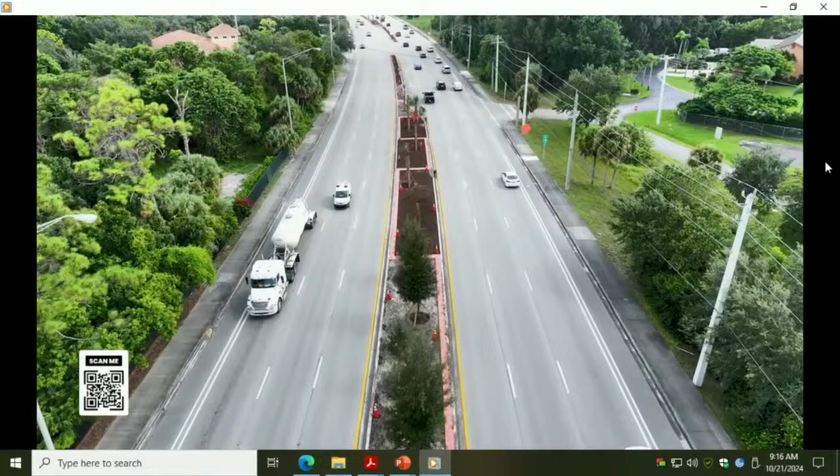Our 2050 LRTP is our 25-year planning horizon document that'll be our guidebook for the transportation projects in Martin County, and we're very excited about that. With innovative solutions, and most importantly, community input, we're shaping a future where transportation enhances the quality of life.

Transportation is extremely important. There's individuals who solely rely on that transportation service, and it's imperative for them, knowing that there's a bus system that will be there every morning. The LRTP is a commitment to sustainability, safety, and resilience.

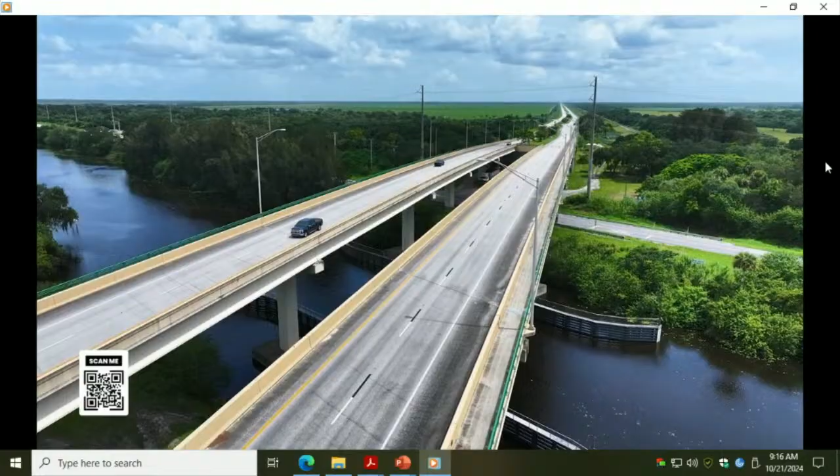From roads, bicycle lanes, sidewalks, freight, and waterways, the MPO's LRTP looks to enhance all aspects of the transportation network. The infrastructure has not caught up with the demand of supply, and we don't have the roads to carry all these trucks. Through planning and collaboration, we're ensuring that Martin County moves towards a better future.

The Long-Range Transportation Plan is paving the way for a smarter, greener, and more inclusive tomorrow. Join us on this journey towards a better future. Participate in our survey, attend our workshops and meetings, and share your vision. For more information on how you can get involved, visit our website at martinmpo.com. Martin Moves 2050 - together, let's plan a better future for Martin County.

So that's the video. We'll be sharing that widely. We also have a project webpage that sits on the Martin MPO website. We made sure that the project webpage is ADA accessible, and there's a QR code so that folks can easily access it without having to remember the entire URL.

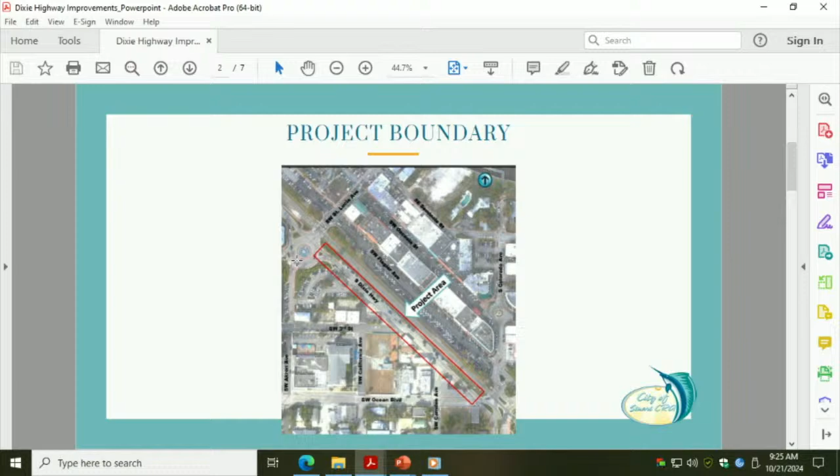Right, forward. Use the mouse wheel. There you go, sorry. So you've seen this multiple times. The scope of the work is improvements along Dixie Highway from Joan Jefferson to Ocean Boulevard and Colorado Avenue. Can I interrupt for 1 second? Can we make it full screen so it's a little bit bigger? Please. Thank you.

You'll note that 2 feet of our travel lane is actually in the FEC right-of-way. So if they don't want us to make any modification, what we want to do is just work within the city's right-of-way. Should they ask us to remove those on-street parking, we can easily do that and put that location back into the condition it was prior to installing the on-street parking.

After the meeting, we went back out to the community and presented different options, and the consensus was they do want to keep two-way traffic. So the proposal before you today is two-way traffic, and we also went to the CRA board and received approval on the conceptual you're going to see today. As far as the confusion corner, that's currently not in the scope, but we can discuss that after we discuss the scope of the project.

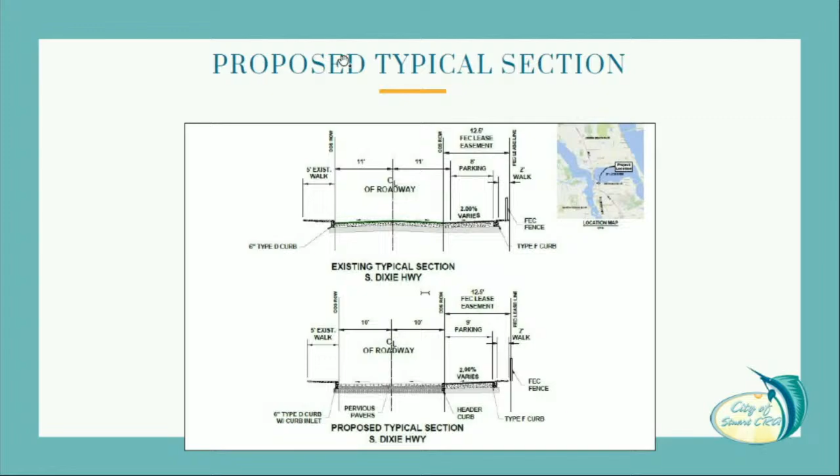This is really just to give you an idea of what the corridor could look like. At the bottom is the proposed improvements. What you see out there today, this is the old Creative Auto site.

The gentleman that purchased that has come up with a plan for an improvement to this building, some outdoor seating and so forth, and some landscaping. So we put that into a landscape rendering.

You can see the pavers proposed here. This area on the left side of pavers is actually southbound, and the area here is northbound. We will probably just leave the asphalt that's out there in the parking spaces that potentially could be removed, which is on the right side along the FEC Railroad.

You can see sidewalks, some trees being added, and the street lights. A major improvement - if you go out there today you'll see there's ponding of water. We plan on also providing underground storage or exfiltration pipe with inlets and so forth to provide drainage for this corridor, so there'll be some improvements on the drainage in here also.

Having said that, I would entertain any questions.

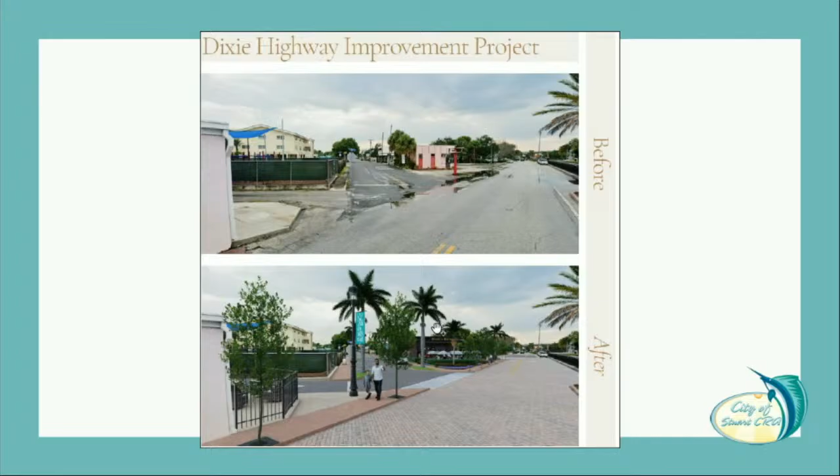So we think that we are a little bit far along with the Dixie Highway Improvements Project, that we could easily, if this were to move forward, just modify the perimeter of the Dixie Highway Improvements Project and still be able to achieve what we want to achieve with Dixie Highway, and then work on this as I get direction from my board.

Maybe Commissioner Smith might want to speak a little bit more on this design. Great, well thank you. Do you want to go first, or do you want me to go? That's just new to me, so I'd like to hear about that first. Maybe I could incorporate some of mine.

So last time we talked about this, there was a lot of conversation, certainly about Dixie Highway and what was being proposed as a one-way link. And I think putting it back to two-way was probably the right thing to do.

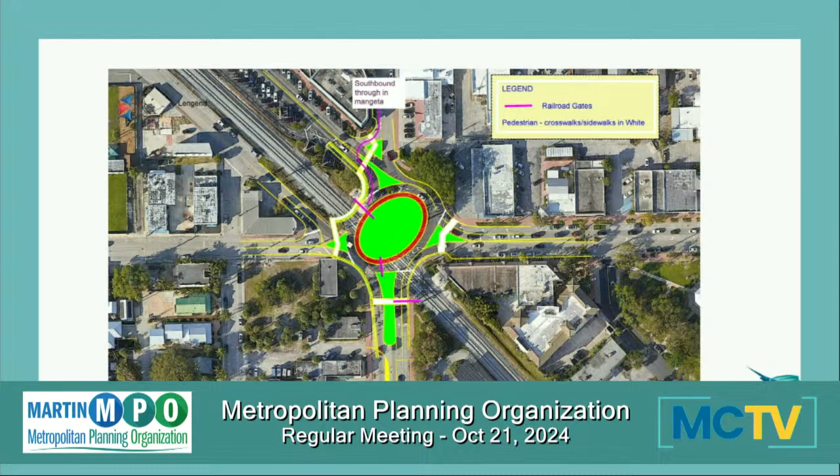But there's also, I personally think, because I'm in this intersection at least 5-6 times a day - my wife's office is 2 blocks from the roundabout here - I watch people do the craziest things known to mankind in the current configuration with all the little islands, the splitter islands.

If you come north on Colorado into the roundabout, the other day I watched a truck come into the through lane because the backup trying to go up Dixie Highway to the north was probably 12-15 cars long, and he decided he's not going to wait for that, so he flew into the middle lane, flew around the roundabout, because when you come out of the roundabout into Dixie you get the right-of-way going onto Dixie North, which caused all sorts of issues because people were watching what he was doing, and it just got everybody even that much angrier.

The 2 cars that can stack now in the little piece at the end of Southwest Ocean Boulevard as you come into the roundabout, that's a constant battle as to who actually is going to give and who has the right-of-way going into Dixie Highway North or coming out of the roundabout.

Likewise, coming south on Dixie, what we discovered when we were looking at this, and what I think Michael can still fix if there's interest to do this - today if you're coming south on Dixie into Confusion Corner, you cannot go to East Ocean Boulevard east. You have to go south on Colorado to do a U-turn or come on some other direction.

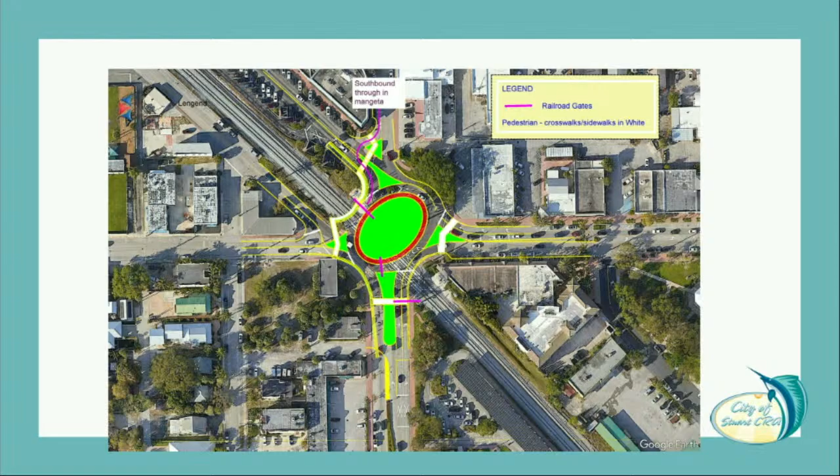There's a question whether we lose or don't lose the parking on the east side, which I think Pinal is 28 spaces, correct? On the east side? The church certainly has been under contract, at least that I know of, twice in the last couple of years. Chances are at some point in the future that property is going to redevelop. I think they've already acquired or are in the process of acquiring property out on Kanner. And so then you have the couple commercial buildings on Dixie Highway today that have communicated in the past that there's interest in selling at some point for the right amount of money, clearly. But that isn't going to happen yet.

And so my suggestion, at least for everybody to think about, is that the plan should be designed about what you want the final cut through or cut line to be actually going through Dixie Highway.

Southwest Ocean, you have all of the right-of-way, you have on-street parking on both sides, but it could certainly use a facelift, and it could use a treatment and an application of that treatment like is being proposed for Dixie, that could really make it a great-looking street and help it redevelop someday into a destination street, very much like what happened to Colorado 10 years ago when the city decided to completely redevelop the cross-section of all of Colorado going out to US 1.

I can share with you that having my wife's office on that section of Colorado, it's an entirely different street. It behaves differently. People come there. It's a very active place to go now, where it wasn't 15 years ago. There was a lot of criticism of the city back then when we took out two lanes of through-traffic off of Colorado, that it was going to shut it all down and make it difficult, and it did just the opposite. It's made it flourish and become a great little component of Stuart.

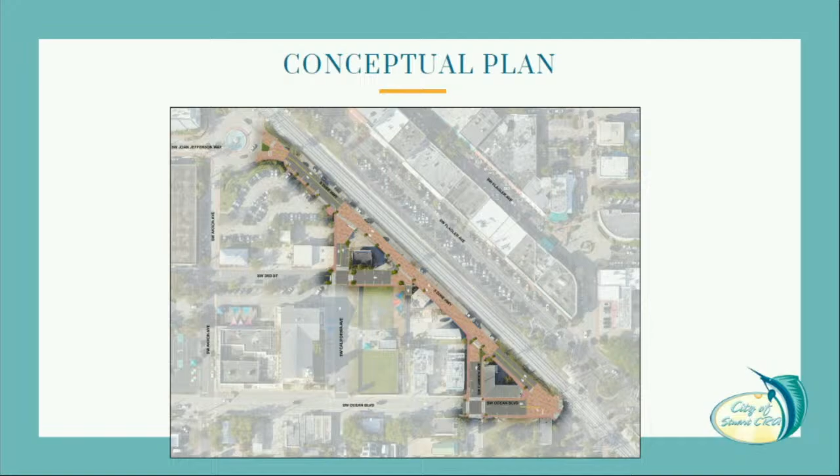I think that's it. Commissioner Hetherington? I think that, Chris, is that you? Oh yes, it was me again, George Zama.

I just wanted to reinforce that the agencies submit for these grants and are approved by the board ultimately for DOT to include in their work program. Once the scope is submitted, DOT, there is a little bit of flexibility, but once your project limits are established, it is greatly recommended to stick to the original scope.

I think going back and reanalyzing the traffic flow was a good process, and overall I think it's a great project. The other thing I wanted to mention is the approach moving forward. It would be good to know, for all the agencies, the MPO board's expectations for these types of projects.

As Commissioner Hetherington mentioned, we only get about $450,000 of allocation. The county's approach for these types of projects has always been that the greatest cost benefit comes from adding pedestrian or bicycle facilities, like sidewalk projects.

That doesn't mean this project doesn't qualify by any means for all the scope that's been added, because from what I understand, historical, cultural, environmental, which includes vegetative management for projects, do qualify. So moving forward, the county can scope out certain projects for TA grants.

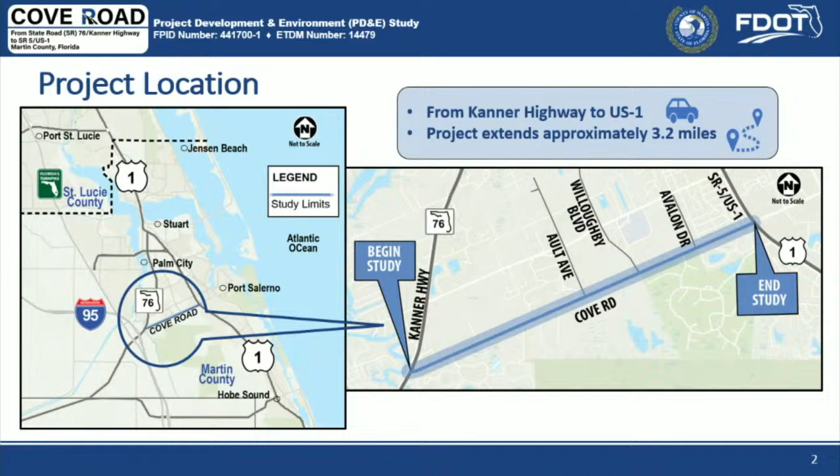The existing road from Kanner over to Avalon, about 3/4 of the project, is a 2-lane rural road. It widens out for left turn lanes in some areas. It has swale drainage and sidewalks along both sides of the road, and we've got plenty of right-of-way. It was really intended to be widened to 4 lanes through this section.

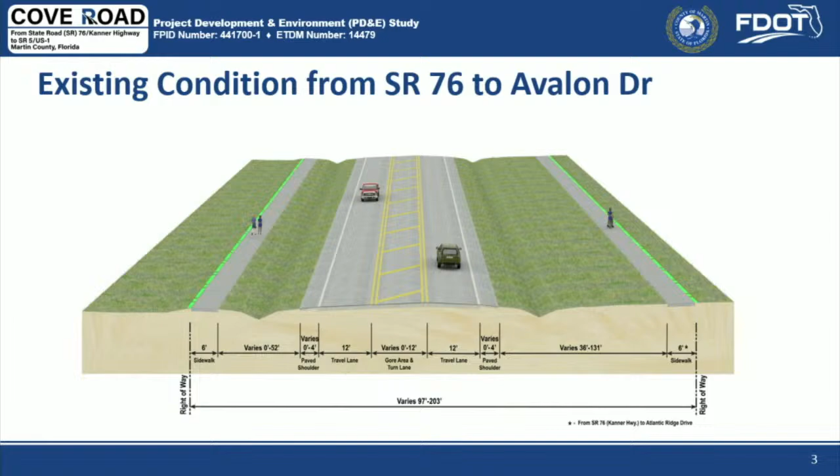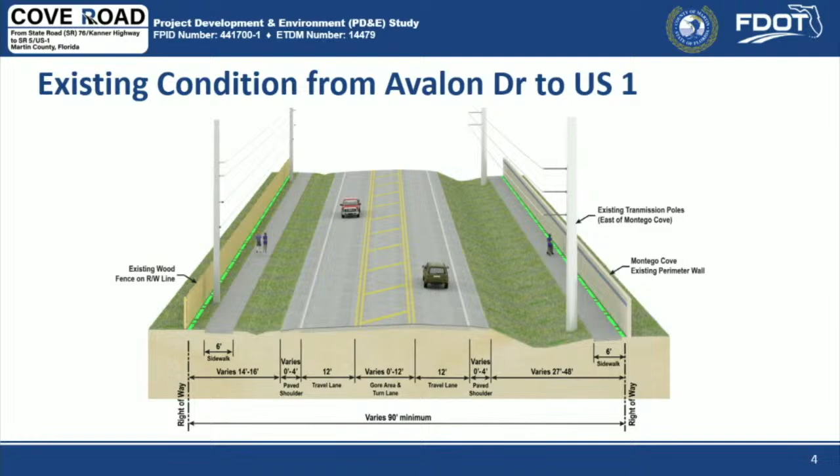The last quarter of the project, from Avalon over to US 1, is really where we have our constrained right-of-way. We're down to about 90 feet of right-of-way, so getting a 4-lane road in here has been quite a challenge. On the left side is the north side of the road, that's the Hibiscus Park neighborhood, and they back up to Cove Road. On the south side we've got the Montego Cove condominiums, a 55 and older development, and we've also got some large transmission poles that come into the right-of-way in that area as well.

As far as public involvement goes, we had a kickoff public meeting in March of 2023. We held our alternatives public workshop in May of this year. We presented to you all prior to that meeting and told you we would come back and give you an update of what happened. We've had a lot of things go on since then, so that's why it's taken us a little longer to get back to you. We've had small group meetings with some of the neighborhoods, the South Fork HOA, and the other developments at the west end of the project. We met with the Montego Cove board as well. As Vanita said, we've got the public hearing tentatively scheduled for early 2025, and this is the project website, which we update with information as it becomes available.

So this is what we presented at the public meeting. Essentially, we had 2 options in the first segment. The first one, 1A, had on-road bicycle lanes and a shared use path on the south side and a sidewalk on the north side of the road, a 4-lane divided roadway. Alternative 1B is the same essential 4-lane divided roadway, however we removed the on-road bicycle lanes and have shared use paths on both sides of the road. That seemed to have a lot of support from the board previously.

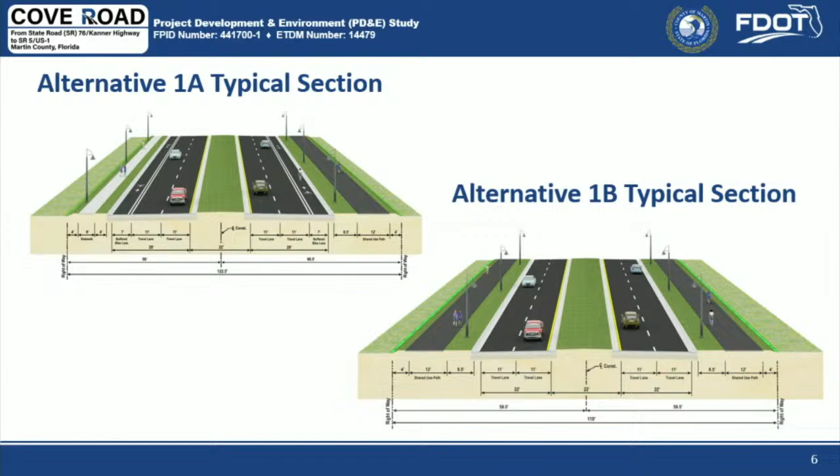In the second segment, we looked at a couple different options that included various combinations of on-road bike lanes, sidewalks, and shared use paths. 2C is the one that kind of mimics 1B with shared use paths on both sides. It did require a little bit more right-of-way than alternative 2D, which we really looked at to see how much we could reduce the right-of-way footprint, pulling the sidewalk up to the back of curb on the north side of the road and some other things. So that's what we presented to the public to get their input.

Can you go back just for that? How do I go back, Ricardo? Mouse wheel?

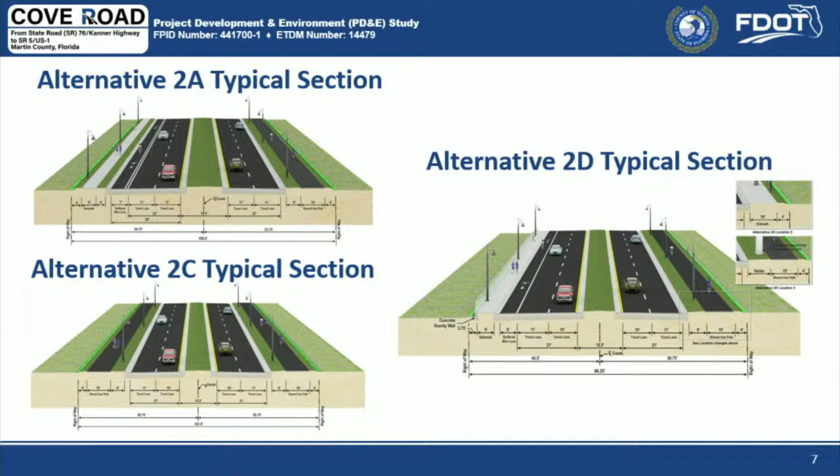So the difference between 2D and 2C is that little pull-out flyout, sidewalks next to the curb. 2C does not have any on-road bike lanes, while 2D has a bike lane and it's got the sidewalk on the north side. Essentially, we can't use a sidewalk to provide both bicycle and pedestrian function. So if we have a sidewalk, then we have to have a separate bicycle lane, whereas a shared use path is wider and accommodates both. Thank you, I didn't see the nuance.

That's all, thank you. So we did receive a lot of different comments related to noise, people asking for traffic signals at their neighborhood entrances, some different specific things about U-turns. We did get support for the roundabout that we had shown at the Ault Avenue intersection, people asking for trees and street lighting. But we did get support from the public for the 2 options that had the shared use paths as opposed to the bike lane options. So that's 1B and 2C.

Some of the concerns raised were typical for where we're going from a 2-lane road to a 4-lane divided road, where people currently can go out and go left from their sidewalk or their driveway, and now they've got a median in front, so they're going to have to go right and do a U-turn to come back. That was not unexpected.

We did have a few comments related to flooding, noise, and some other pedestrian-related comments. There were really two areas that we focused on after the alternatives meeting based on the input we received from the public. The first is the area at Gaines Avenue, where we had a lot of input from residents related to vehicles towing boats and horse trailers and how they access this area. The other area was down at Montego Cove, with some concerns about access to and from their development.

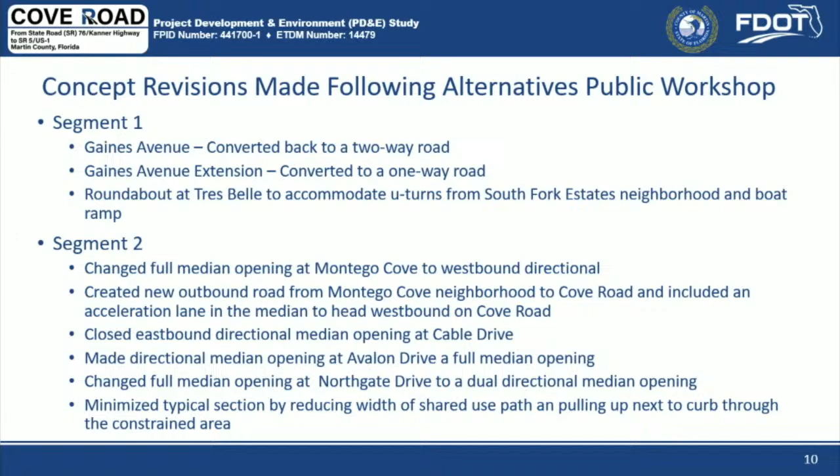As we were completing these revisions that we were going to go back to these neighborhoods and talk about, DOT conducted a value engineering study—a week-long study where they look at our preferred alternative to see if they can come up with cost savings ideas or value-added ideas to improve the concept. During that study, the midweek meeting on a Wednesday, we knew what they were going to propose, and that Wednesday night was when we had scheduled our first meeting with the South Fork residents. So we were able to say, this is what was proposed to them. The value engineering came up with another option, so we were able to get input on both options at that meeting. Then the next night, we met with the Montego Cove folks.

There were some minor things that came out of the value engineering related to bulb outs for U-turns, extending some turn lanes, the revisions at Gaines and Montego Cove that I just mentioned, and also a new pond site that they recommended we look at.

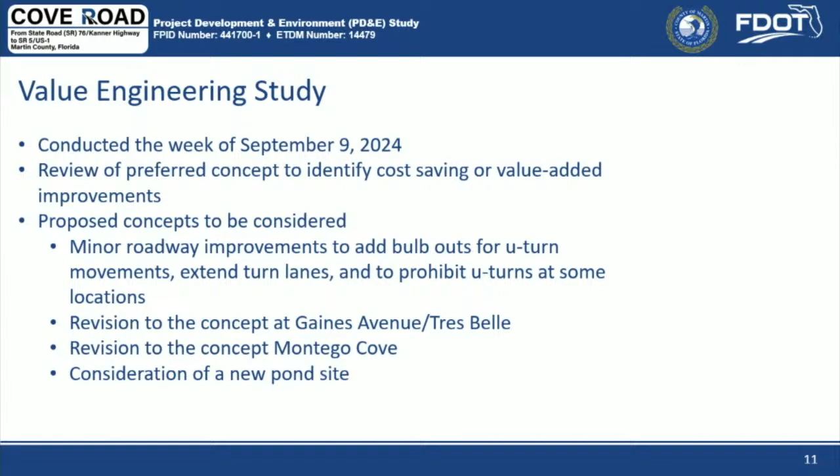After all of that, we do have what we are saying is our preferred option—alternative 1B with the shared use paths on both sides of the road. We can generally fit within the existing right-of-way through this segment. We do have the roundabout proposed at Tres Belle, closer to the west end of the project, and then the Alt Avenue intersection. There are other signalized intersections that are existing that we would maintain.

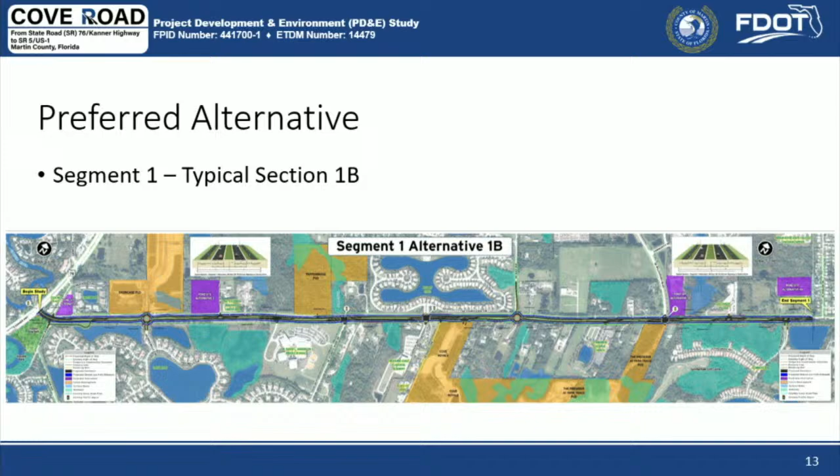This is the existing condition at Gaines Avenue. Right now, when you come off of Kanner, you can only turn right and go south on Gaines Avenue. It's a one-way connection at Cove. This Gaines Avenue extension was constructed by the county because they wanted to move this full access away from Kanner Highway, so this is a two-way road. We got a lot of input from the public about concern for trucks with trailers making this sharp curve and conflicting with other cars that are sitting there waiting to leave.

This is really the one area that I mentioned. The value engineering concept proposed to close this connection of Gaines Avenue altogether and force everybody down to this one location. Well, the residents didn't like that at all when we met with them. So this is the concept we're moving forward with, that we showed to the neighborhoods down here and they liked—converting Gaines Avenue back to a two-way connection at Cove Road, so they can go in and out of this location. And since we're proposing to close this full opening at the Gaines Avenue extension, it's providing a westbound directional—a one-way road that we'll make a little wider to accommodate. So they like this idea.

How do you go west out of Gaines onto Cove?

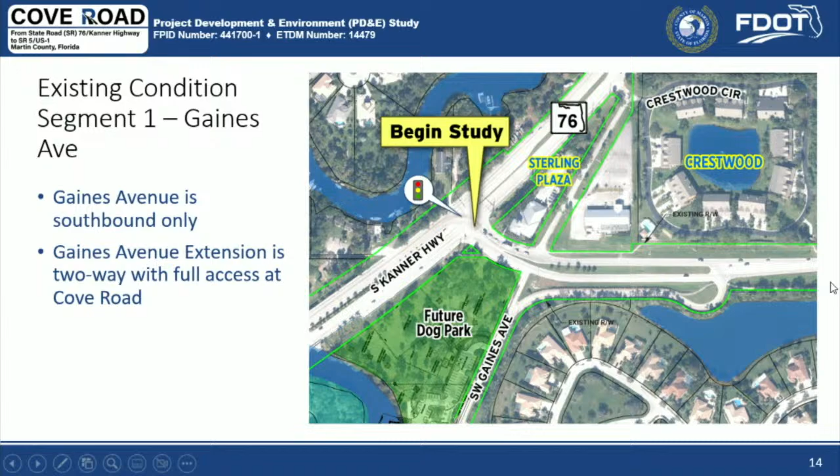It just seems so counterproductive to cut off Gaines from being able to go out to Kanner. Well, at this location, you're right, they'd have to go farther east to do the U-turn. The other benefit of the roundabout at Tres Belle is we got a lot of concern from people saying that people coming off Kanner are just flying. One reason is there's two lanes here and they're trying to get down to one lane, so they're trying to beat each other to the point, which we wouldn't have. But again, this is seen as kind of a traffic calming improvement as much as anything.

Mr. Hurd, any other questions on this area? Yeah, I'm confused. So we're talking about Gaines. Are the people on Gaines going to be prohibited from turning west? Yes, correct. So they're instead going to go on Cove Road east to the roundabout in order to go west? Right, okay.

That's okay, no, I think if I lived down on Gaines, I'd be pissed. I don't know, I'm a fan of roundabouts. We did get a lot of positive feedback. I think the boat trailers and horse trailers, people really like the idea of being able to do something like that. Yeah, I just would do it further west, that's all.

I think it's worth considering that if Gaines stayed two-way traffic down to where the bulb out is in front of Tres Belle, that you do the roundabout there. Just to look at it to see what it really does to hurt anything, versus it gives the Gaines people a couple hundred feet less, you got to go east to go west. Because right now you can go west on the current configuration where it is, but anyway.

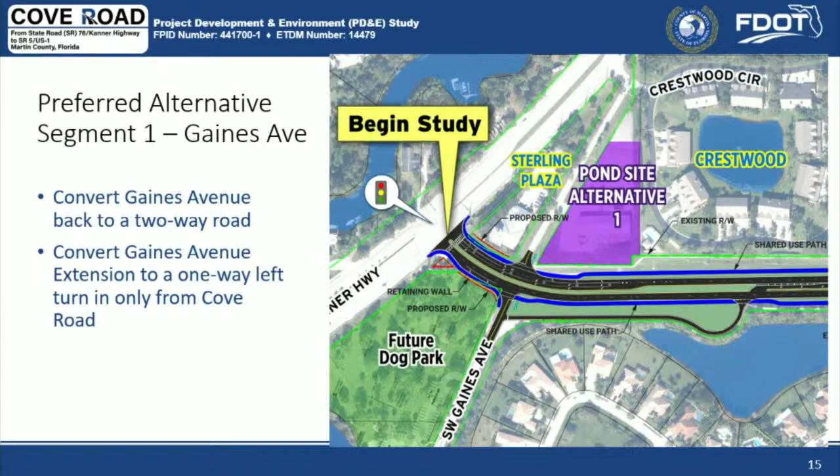Anything else on this? Not unless you all have any other questions. But any other segments you were gonna highlight? Yes, I was just going to quickly touch on Alt Avenue. We've got the roundabout proposed as well, that we got a lot of positive feedback on at the public meeting.

And then in segment 2, this is really the tight area. So what we essentially did was take the 2C option with the shared use paths and convert it to the 2C modified, which is minimized. We met, we've got some design variations that are going to be approved because this is a really short constrained section. We've got an 8-foot shared use path, the lowest you can go as far as width, pulled up to the back of curb.

We are currently working on the noise study, but we anticipate a noise wall will be warranted along the back of Hibiscus Park. So we're going to use that as a dual purpose retaining wall and noise wall to stay out of the right of way. We've got a minimized median down to 15.5 feet in this area. Again, there are areas we may pull this shared use path up to the back of curb, but we can essentially fit this between Montego Cove and Hibiscus Park with no right-of-way impacts for that segment.

So curious, you said the median, what's the width of the other cross-section median? 22.5 feet is a standard median width. So on the west section, on the 1B cross-section, you've got 4 foot on the south side between your shared path and the green dotted line, right? Mm-hmm, yes, you've got 4 feet there. You've got 6 feet where your light poles are, so you've got 10 feet.

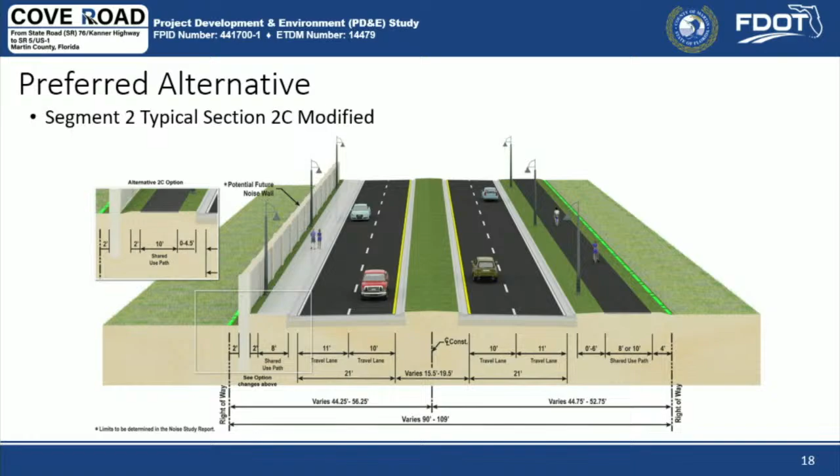Yeah. Chris? Thank you. Okay. Anything else? Oh, I'm sorry, Stacy. Commissioner Hetherington, this was for the end of the discussion.

You mentioned, and I've talked to some residents in the area that have flooding concerns and water, and I know this is in the PD&E, the environmental side - I would hope that we're considering a significant amount, much more drainage potential than our current Cove Road in this existing segment all the way down.

Yeah, there aren't really any ponds for the road right now. It's just roadside swales. This proposed improvement will include curb and gutter with piping to offsite ponds. So we've got several ponds identified. Thank you.

Again, you can see a little bit here - this first part is kind of where we're in that tight right-of-way. Once we get past the end of Montego Cove, they've got sidewalk access to this building that we need to get past. Then we are widening back out and having more of the offsets that we talked about through the last half of this. But again, I'll go back and look and work with our roadway designers and see what we can do there.

Hang on a second. Mr. Collins? To Commissioner Hetherington's point, with drainage, of what's getting built there in terms of sidewalks and concrete - is any of that permeable? Is there any look at, because to me, if you're going to build anything new through here, making it as permeable as possible. I know you're talking about gutters and drainage, but just generally.

Yeah, there's nothing really permeable other than like the grassed areas, the median, but the shared use paths would either be asphalt or concrete sidewalks. Is there any thought to do something like that where you can have more permeable surfaces? I don't think typically those kinds of things have been considered during the study. I don't know, in this part of the county, if you're going to have somewhere drain well. The drainage design will meet the needs of the project, so in terms of a drainage perspective, it's not constrained where we have to add permeability. We can accommodate all the drainage with the impervious surfaces, with the retention pond and the piping and the drainage structures previously mentioned.

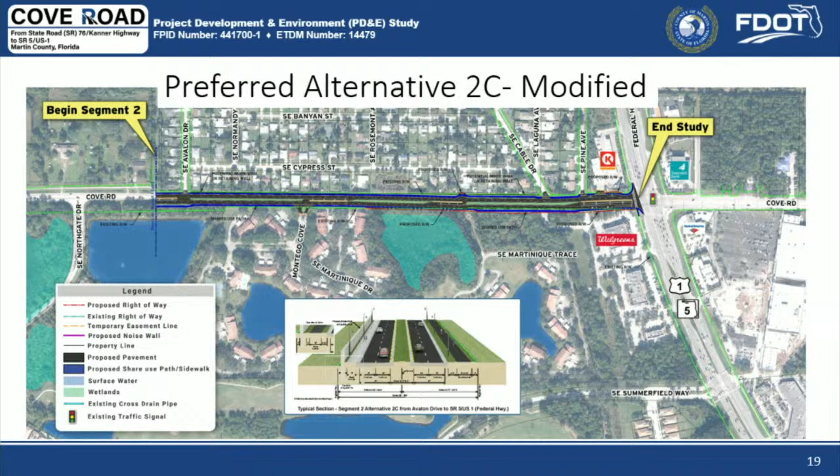All right, thanks, Vanita.

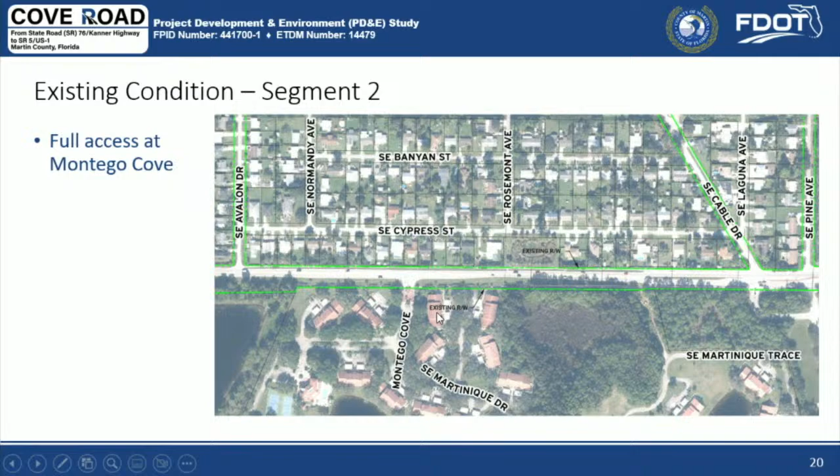Just real quickly, Montego Cove, this is their community. They have one access point onto Cove, and they raised concern with turning left out of the community onto Cove Road. So we are proposing a directional median opening so they will have to go out and go right, and we've introduced a U-turn where they can safely get into a lane, sit there, and wait for traffic in the other direction, so they're only having to navigate one direction of traffic.

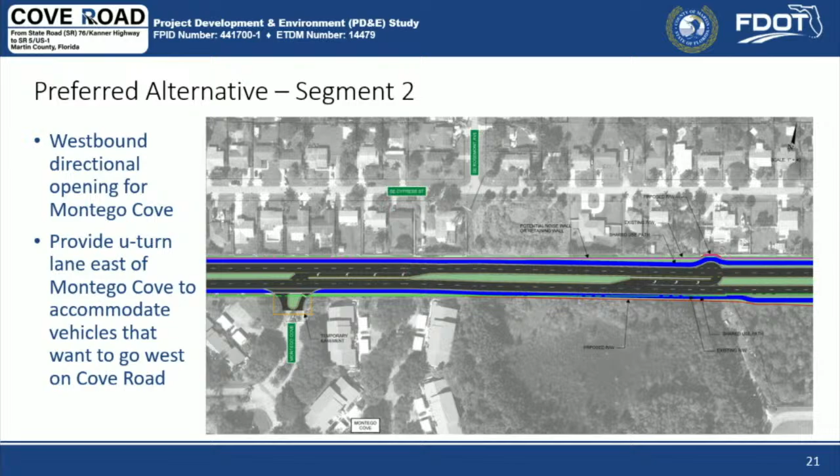This month is National Pedestrian Safety Month, reminding drivers and pedestrians that staying safe is a shared responsibility. In 2022, there were 10,000 pedestrian-related crashes, a 5% decrease from 2021 in Florida, and 765 fatalities, an 8% decrease from 2021. As daylight savings time ends and it gets darker earlier, the risk for pedestrians increases. The vast majority of hit-and-run fatalities occur at night or during low-light hours. Drugs and alcohol can not only affect someone's ability to drive, but can also alter someone's ability to walk safely. Pedestrian safety is a shared responsibility between pedestrians and motorists. Our data shows a pretty equitable split between who is at fault in these crashes, which is why it's so important for both motorists and pedestrians to remain vigilant on the roadway and behind the wheel.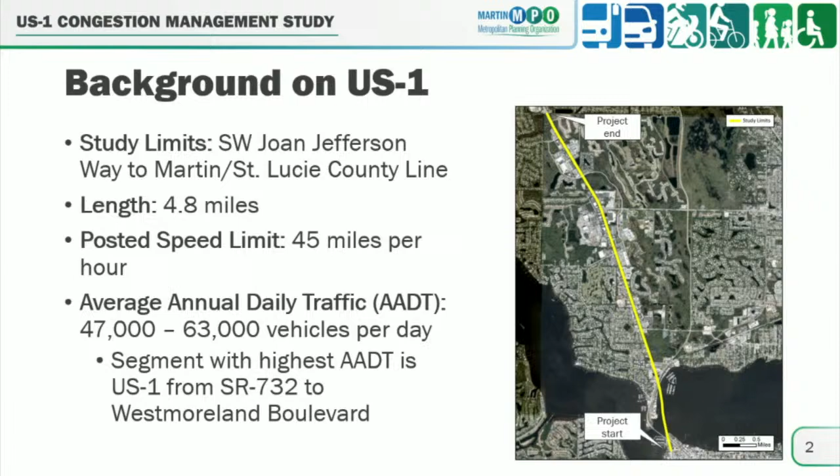Our background on this study is that it includes the section of US 1 from Southwest Joan Jefferson Way to the St. Lucie County line. This is approximately 5 miles in length.

This section of US 1 is the busiest section of US 1 anywhere in Martin County. In fact, it's the busiest non-interstate roadway anywhere in Martin County, with 63,000 vehicle trips per day in its busiest segment. Almost 92% of these trips, or at least the work trips that happen on US 1, are drive-alone trips, so only about 8% are multimodal.

So we know we're dealing with an environment that's vehicular-oriented, and most trips are drive-alone trips. It's also important to point out, we know from prior studies that 24% of workers in Martin County, people who work in Martin County, reside in the city of Port St. Lucie. So from this, we can gather that there are a lot of commuting trips from St. Lucie County that occur on US 1. But there's a lot of local trips as well, a lot of commercial and institutional uses along US 1 that attract local trips as well.

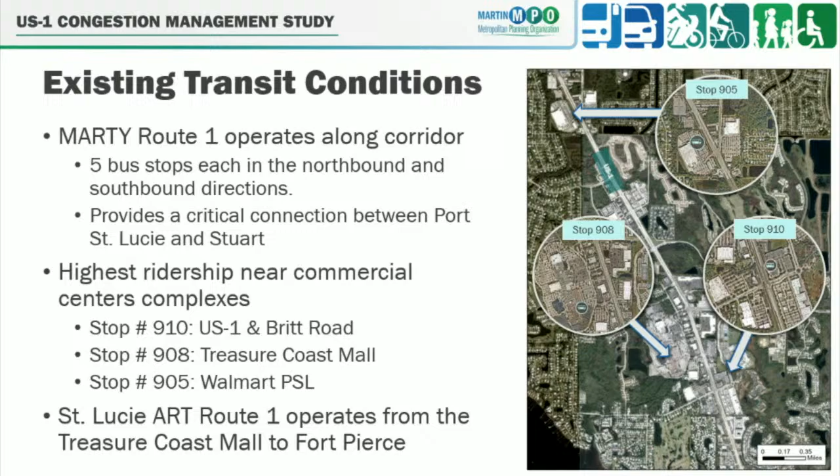We're studying the transit conditions, both MARTY Route 1 as well as the St. Lucie County ART transit system which operate along US 1. The highest ridership stops that we have identified are all near commercial centers: Britt Road, the Treasure Coast Mall, and the Walmart at Port St. Lucie are the highest ridership stops.

From our analysis, we have found that there are lots of large parking lots and large parcels. The commercial parcels are quite large along the corridor, and they're developed in a suburban way. So what this creates is a setting where we don't have a lot of grid street connectivity. Most of the trips are concentrated on the arterial roadways and the few streets and driveways that connect to the arterial roadways. There's also something of a lack of connectivity between the properties themselves. Many of the properties on the east side of the road don't connect to their adjacent properties, and many of the properties on the west side don't connect to their adjacent properties.

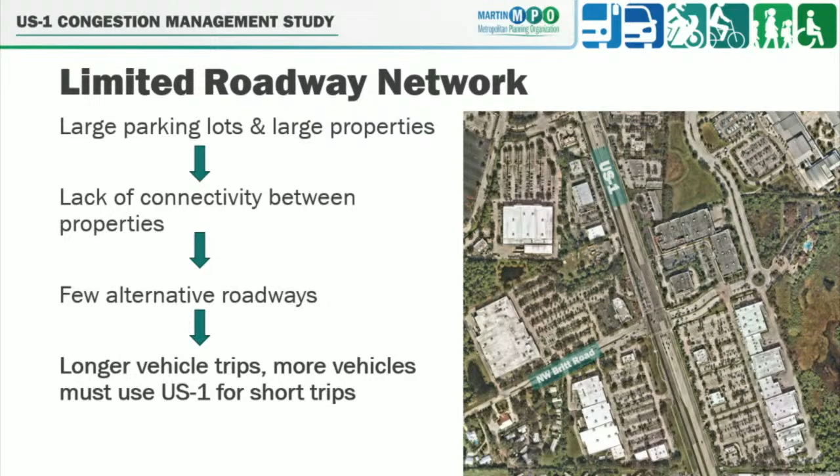So what this means is that more vehicle trips must use US 1 for even short trips. If you're pulling out of one shopping center, you often have to pull onto US 1 for a very short amount of time to get over to the next shopping center. Sometimes that movement involves U-turns as well, which adds to the queues for left turning at signals along the roadway.

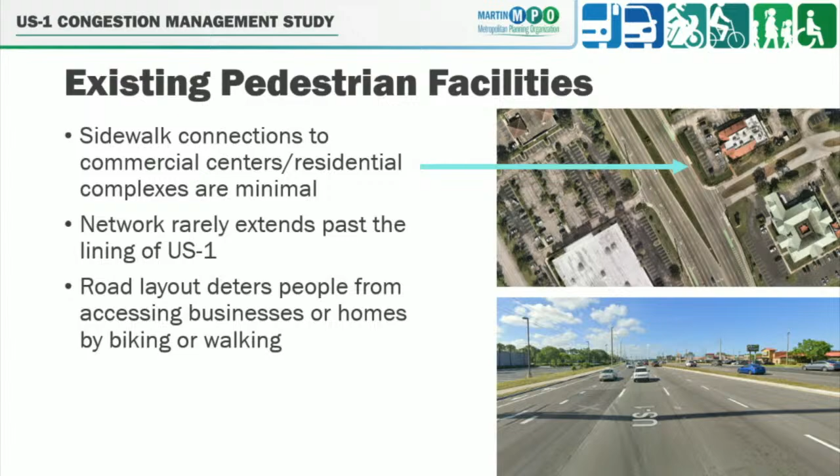The existing pedestrian network is somewhat limited. There are sidewalks that exist along the majority of the segment of US 1, and they tend to exist along the lining of the commercial parcels as well, but don't extend into the parcels themselves. This creates an environment that is somewhat non-walkable.

For traffic data collection, we've conducted traffic counts along the roadway, as well as turning movement counts at signalized intersections along the roadway. We've also looked at travel speed and travel time runs. Generally speaking, the corridor during peak periods operates at an average speed between 20 and 30 miles per hour, and the PM peak period tends to be more congested than the AM peak period.

But what we've learned from our speed data, as well as a lot of the input we've gathered from the public and from our committee presentations, and presentations also to the City of Stuart Commission and to the Martin County Commission, is that speeding and the perception of speeding and aggressive driving on the corridor is one of the things that people perceive to be the most dangerous part of driving or traveling along US 1.

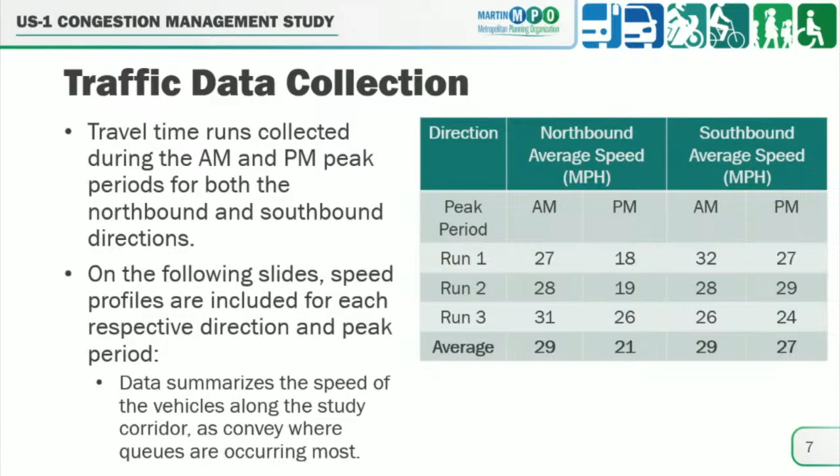So that's a good segue to our congestion mitigation strategies section. We are developing strategies that are largely based on the public input that we have received, as well as the technical analysis that we have conducted.

So in addition to the public workshops that Bonnie is going to discuss in more detail in a moment, as well as presentations to other elected official bodies, we've also had a project advisory committee made up of representatives of agencies along the corridor, as well as law enforcement representatives, that has been guiding the work we've conducted so far and has provided a lot of input to these congestion mitigation strategies.

Because of the aggressive driving we have observed as well as heard about along the corridor, one of the strategies we're recommending and developing is related to and building from the MPO's adopted Vision Zero plan. The MPO's adopted Vision Zero plan includes strategies related to law enforcement, and we're going to be developing a strategy for US 1 to apply that Vision Zero concept to effective enforcement strategies along US 1.

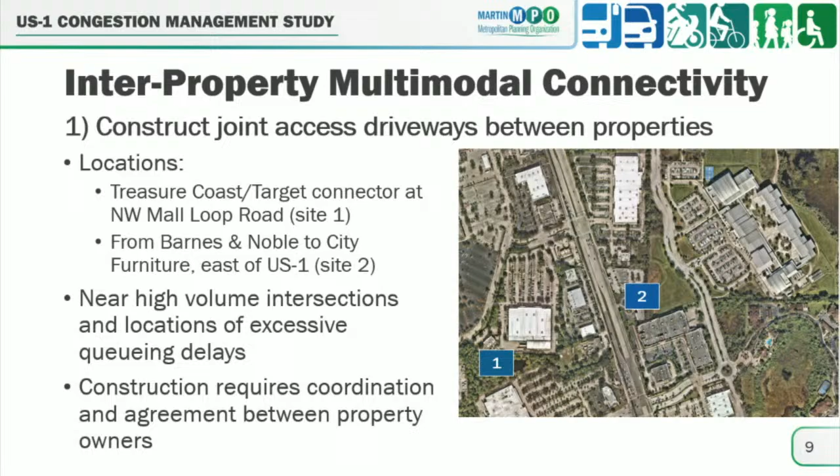On the engineering side, one of the strategies we're recommending is to work with local property owners to increase the amount of inter-property multimodal connectivity between businesses along the corridor. We're recommending these near high-volume intersections where short trips on US 1 can really make a big difference in the amount of queues occurring, the length of the queues, and the time it takes to get between two different intersections.

Two examples include connecting the Treasure Coast Mall and Kohl's area to the Target on the north side of Britt Road. Also on the east side of US 1, north of Britt Road, the parcels along the east side of the road could be better connected to improve people's ability to make short trips without getting out onto US 1. So the area between Britt Road and up to Jensen Beach Boulevard is where we're concentrating this type of recommendation.

Stuart, can you go back just a second? You need to extend that green box from the Barnes & Noble mall to the next mall to the north. Oh yeah, it is by far one of the silliest things. There's about a 5-foot separation between that and the Hobby Lobby Mall, or the old Service Merchandise Mall where Sonic is. Anyway, as far as a study or as far as connections go, that's probably as significant as any of those other connections are. Yeah, we'll make sure that's depicted in the final report for the project.

And also, I thought we talked about this last time, but where you have the Treasure Coast Mall connection to Kohl's, there's already sort of in place, just to the very east of that blue circle, an interconnection — there's pylons in the ground between the Treasure Coast Mall, Kohl's site, and Panera, and behind Panera's too, all of that loops through there. But there's literally the first right-hand turn you make off of US 1 into Target, behind the first liner building...

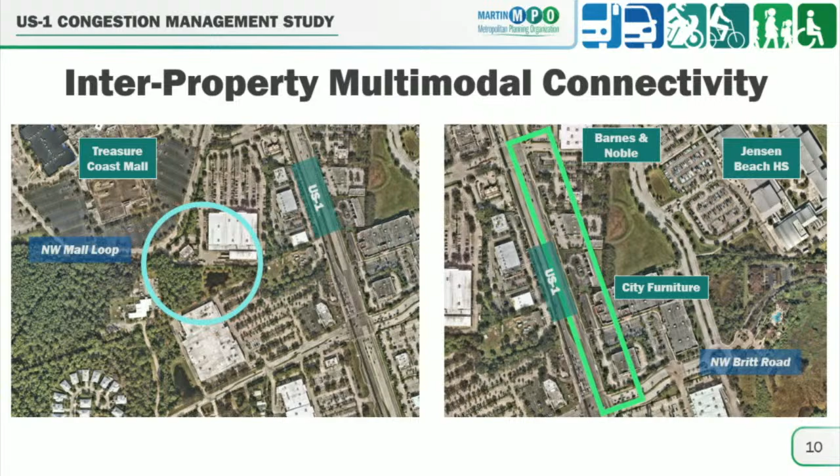We'll make sure that the final report, as well as the version of this graphic that goes into the final report, includes those multiple options for potentially making that connection. I'll also want to look into making sure there's not a separate parcel in between the connection in the drive aisle of the parking lot of Target up to the back of Kohl's. This being a planning study, there will have to be some additional more detailed design work. It's great that we're talking about it and that it's on a study somewhere, but if you really want to improve congestion on US 1, those interconnections are absolutely imperative. We'll also extend the green box on the east side of US 1 up to the Hobby Lobby Shopping Center. Great, thank you.

Our second bucket of improvements are related to multimodal safety. One recommendation we are developing is a short-term one related to the bicycle lane on US 1, the green bicycle lane. That would be to work with FDOT to request they install auditory and vibratory edge line striping. This would be a different type of 6-inch thermoplastic marking between the buffer of the bicycle lane and the motor vehicle travel lane. This would alert motorists drifting out of the designated travel lane toward the buffered bicycle lane.

However, I will say that this type of edge line striping is typically not used by FDOT on 45 mile per hour roadways in urban areas. It's typically used in rural areas or on long bridges.

So can we pause there? I was going to do this at the end of the meeting. Oops, Stacy, you want to go first? I was just gonna...

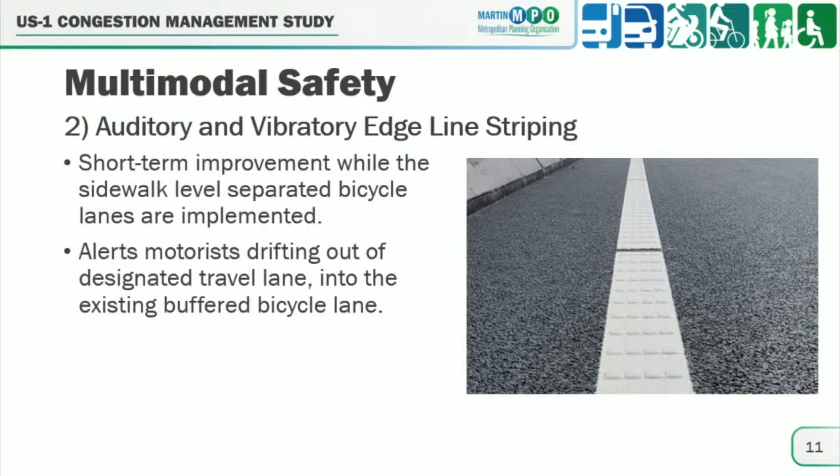On this auditory, vibratory striping - I think it works very well out of Martin Grade, these work fantastic. But if you put those arrows down US 1 where you have to drive over those flashing... what are those things called? Reflectors? Pavement markings. By the way, we're gonna hopefully talk to FDOT about those at the end. They are absolutely distracting and terrible, and it conditions people to hear that kind of vibratory sound as you're running over them all the time. So when they're running over these off the road, they're so used to hearing them in the middle of travel lanes that these don't become as effective. Do you know what I'm talking about? The big giant arrows pointing in the direction you're supposed to be driving, up and down US 1 from Monterey all the way north of Jensen Beach Boulevard.

Hopefully we can talk to DOT at the end, but I love this auditory strategy. If you condition people to not listen to them by having those reflectors everywhere in the middle of lanes, then this strategy no longer becomes effective, in my opinion.

We do have a long-term strategy we're hoping to move toward, but this would be an interim implementation. Just one thought on those large arrows with the raised pavement markers in them - those also are typically not installed in urbanized areas on 45-mile-per-hour roadways. You tend to see those more on freeway off-ramps, where the markings and the RPMs that have reflectors in them are intended to notify motorists making a wrong-way maneuver onto a freeway. So it's somewhat rare to see them on urban arterials, which is probably why it's so shocking driving down US 1 and seeing them, running over the raised pavement markers with your tires. It's unusual to see them on freeway off-ramps.

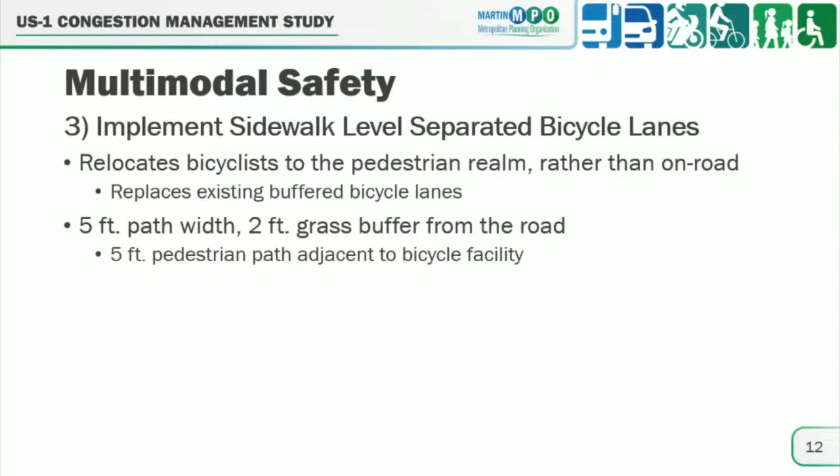Shifting to the same concept of safety separation for bicyclists, but moving toward a long-term recommendation, this would require reconstructing US 1, and that would be to implement what's called sidewalk-level separated bicycle lanes. This is an approved type of bicycle facility that is in the FDM, the FDOT design manual. It relocates the bicyclist essentially to the pedestrian realm rather than the on-road realm.

One of the ancillary benefits we feel like this could have would be that it would narrow the traveled way asphalt width of the roadway. So right now there's 4 lanes northbound, 4 lanes southbound.

Then there's the buffer between the car lanes and the bike lane, and then the bike lane itself. So the road appears very wide, especially when you're driving it during non-congested times. You have this great amount of space to yourself traveling northbound or southbound. As an ancillary benefit, this would ever so slightly reduce the feel of how wide the road is, because the drainage curb would come inward toward the car lanes rather than being outward to accommodate the bicycle lanes.

Stuart, one thing you ought to study, and this is something we talked about with Mr. Drummond's passing, is that even on the Roosevelt or on bridges where you have the Jersey barriers, I would move the Jersey barriers out to the edge, with the speed bike lane inside of it and the pedestrian lane inside of that, but you've at least got the Jersey barrier as a full separation between the drive line and the bridge.

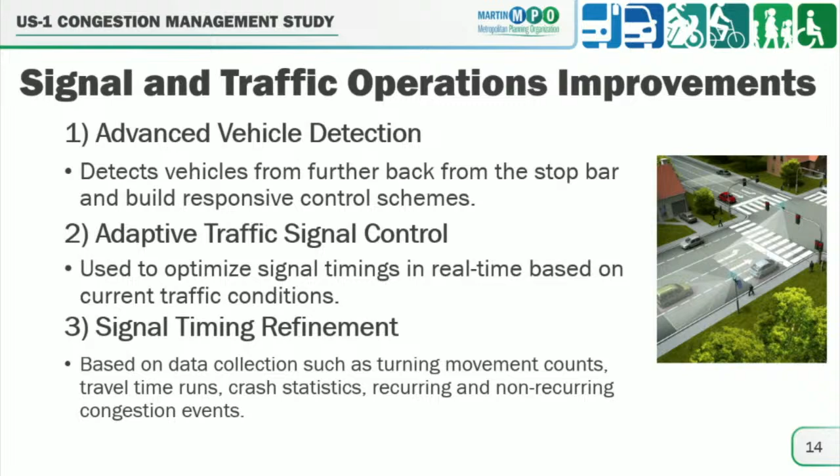We're also looking at signal and traffic operations improvements, including vehicle detection and adaptive traffic signal control to help coordinate the signals better. We're also looking at signal timing refinements as well as potential modifications to the laneage on some approach streets connecting to US 1. In particular, Goldenrod, Britt, and Jensen Beach Boulevard are three we're looking at for laneage modifications to improve safety and efficiency of flow approaching US 1.

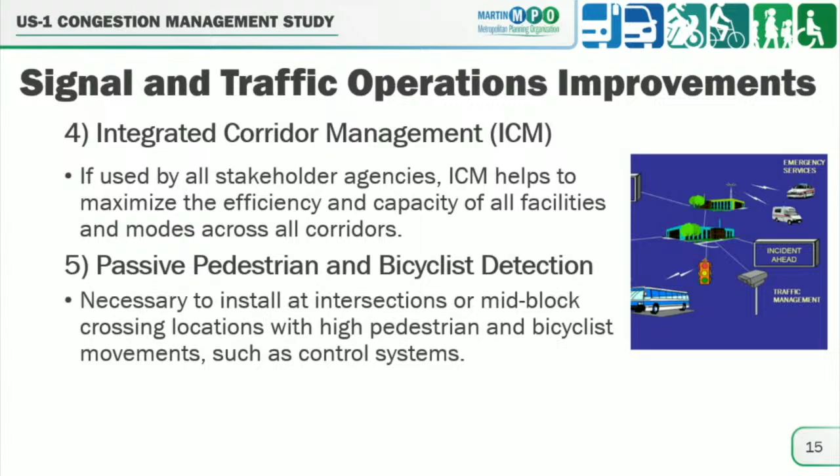Finally, on the technology side, there's Integrated Corridor Management, something FDOT is rolling out that could help traffic flow better and improve communications along the roadway to the traffic operators. And speaking of communications, we're recommending arterial dynamic message signs, or DMS, to help communicate real-time traffic information to motorists. So those are the congestion management strategies we've been working on.

Now I'm going to pass it to Bonnie for the presentation on public engagement, including these business cards for the project, which have been out on the table in front of the room. That's just one of the many strategies we've used to reach out to the public, engage them, and get their input, making sure their thoughts are heard and included within our recommendation.

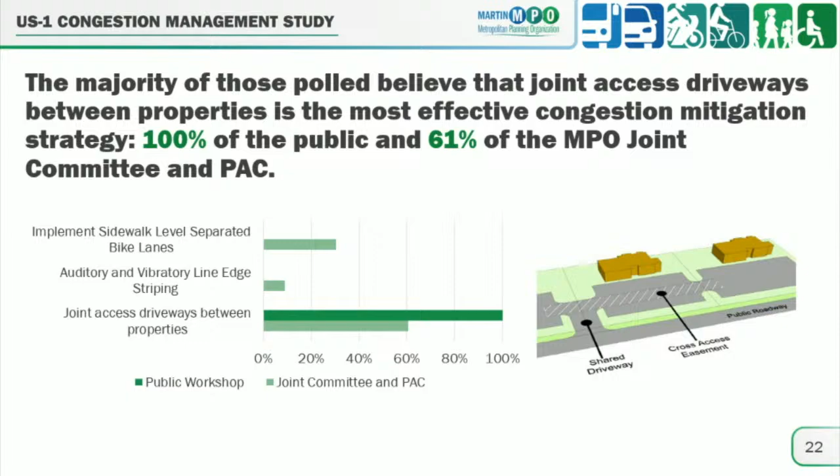Majority of those polled believe that a joint access driveway, at this location they selected, was Treasure Coast Mall to Target. They thought that would be the most beneficial out of all the choices they looked at. Bonnie, can you go back just real quick?

The D connection, between the high school, yes.

That is something that's just a bad safety issue, not having a multimodal path going through there, because tons of kids do it anyway. They go to Starbucks and go over to the high school. They do it anyway. We heard that one of the people we interviewed was the Longhorn Steakhouse manager. He said he sees it all the time, kids cutting through. There's not a proper way to do it, but they do it anyway.

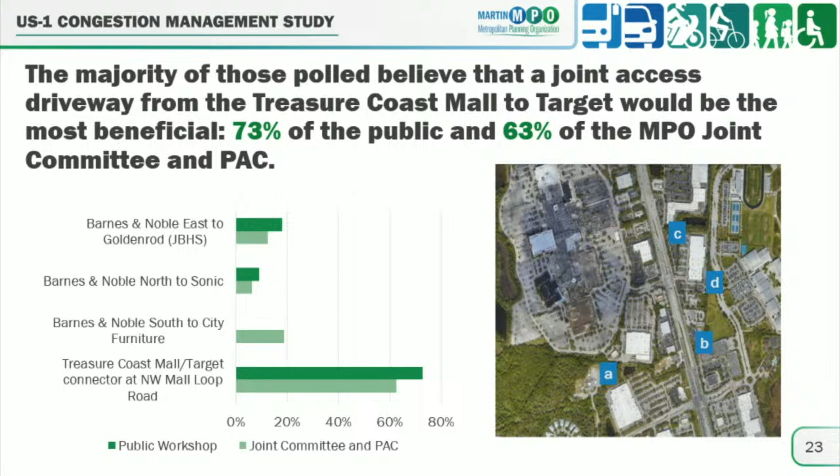Also, the majority of people we polled believed that adaptive signal controls would also be very effective in managing the congestion.

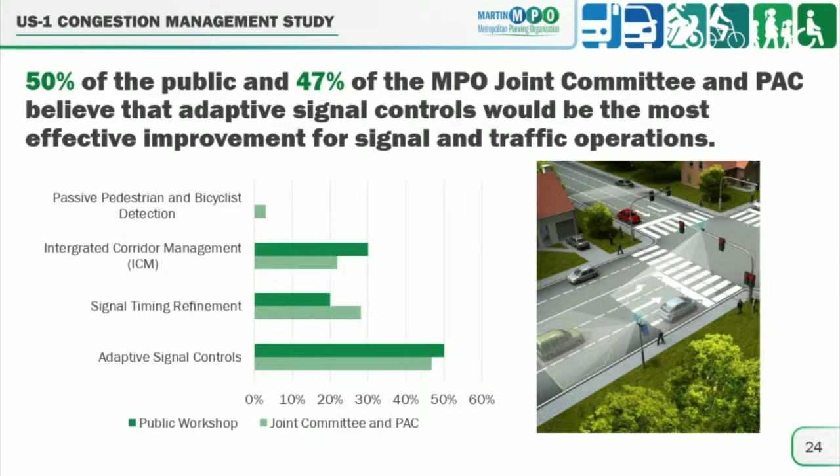90% of the public and 80% of the other two pollees believe either strongly support, or they're not really sure, about the dynamic message signs as a strategy.

Majority believe that the way to reduce traffic, again, is that inter-property multimodal connectivity. It's important to say multimodal, because like that connection with the high school, that would just be a pedestrian connection.

We do feel we've had great participation on the online survey. So far, we've had 270 responses. The QR code on the cards, as Stuart mentioned, is a really quick way — they scan it with their phone, do the survey, it's really quick, and those results go right to our account with SurveyMonkey.

Another interesting thing, one of the questions we asked online participants is, are you a resident of Martin County? 78% of those who participated are Martin County residents.

On transportation choice, 97% believe that they want to drive. We believe some of that was related to feeling unsafe as a pedestrian or cyclist. They're not all cut-through traffic.

55% of those polled utilize US 1 for going to dinner, errands, shopping, et cetera — it's not just people cutting through all the time. And 54% visit multiple locations, meaning, like the commissioner said, they'll go to Target or the mall, but they do it all in one trip while they're out, making a list of places to stop.